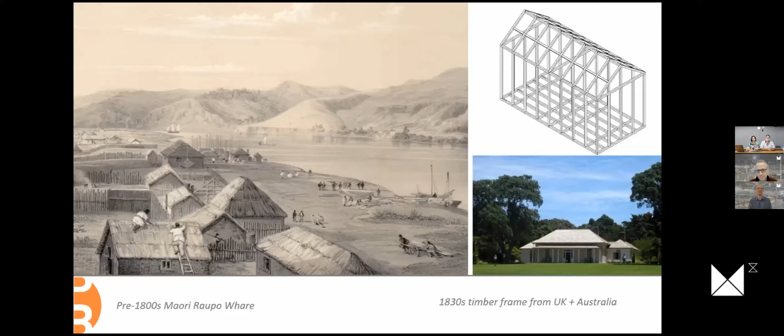Of course, when the white folks arrived, they brought with them kit-set housing. The image on the top right is the Manning Portable Cottage from the UK, and on the bottom right you've got a kit-set timber frame building that came from Australia to New Zealand, known as our Treaty House, a document signed between the Indigenous and colonial people in the 1830s.

In the 1970s, at the height of modernism in architecture and design, there was an influence from a group called Industrialized Building Systems. It was a panelized volumetric method with a very low roof, which was not very easy for regular customers to get accustomed to, because of course the vernacular is to have a higher pitch roof. There were big plans to have factories across New Zealand and Australia, and the government was even backing this.

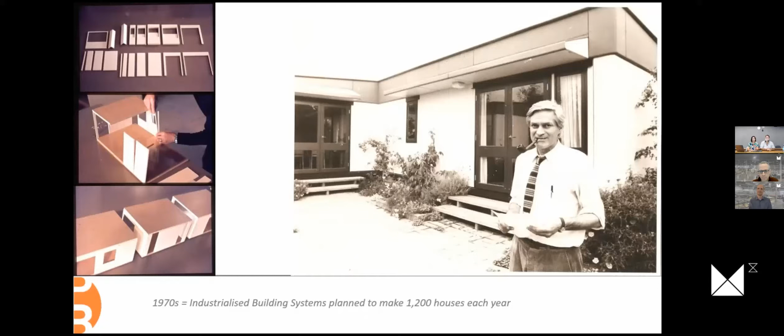But the understanding is, from speaking to a number of these gentlemen before they passed away, that the unions and the builders and carpenters in particular got that stopped. There was risk that they'd lose jobs.

So what has endured in New Zealand is a timber-based traditional building system, and Guy will talk more about that in a minute.

Another import from the Netherlands is this interlocking timber system, which goes under a number of brand names, including Lockwood. Today it's got insulation inside it, and there's an architecture design series to help promote that system of building. And then on the right, you can see the classic pre-nailed frame and pre-nailed roof truss factory. This is literally how 95% of our housing is built today.

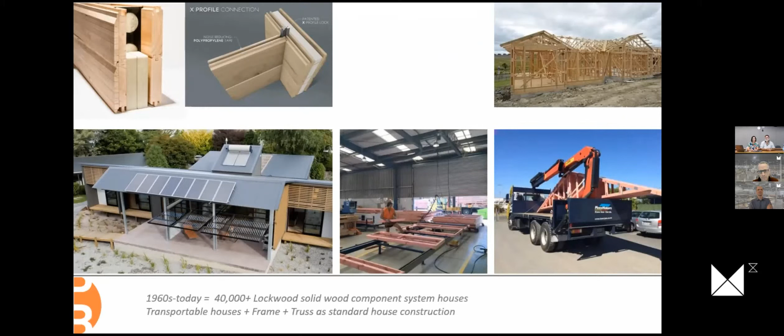Some of our houses get moved in one piece, and because New Zealand has got such a lovely long coastline with a lot of remote sites, we've had a lot of buildings on the back of trucks since about the 1960s, from memory. So where are things at today?

Today, this picture comes from Pam's work at PrefabNZ. So this is the way that we look at prefab in New Zealand. Things are either components that come to site, like we saw in the last picture, or fully built up...

...panels, or volumes, also known as pods, and then hybrid projects, which are a mixture of pods and panels, and then sometimes complete buildings that come to site. So a whole range of mixtures.

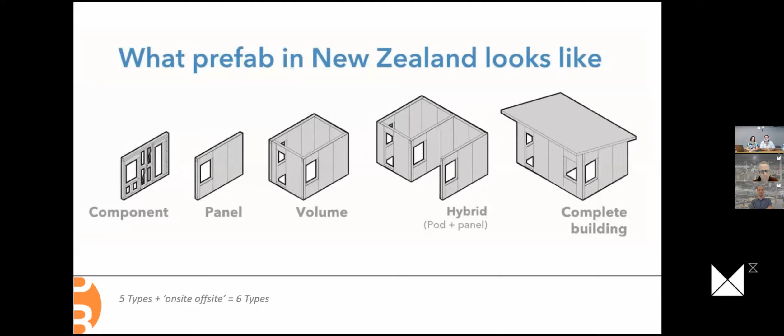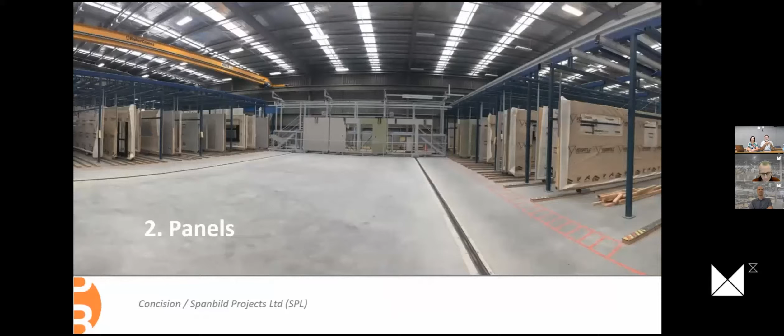The second thing we're looking at is panels. This is one of our new factories that can do this — we've only got a few of these factories. This is the big company down in the South Island, and they're looking particularly at wall panels and floor panels that come to site.

Then we've got volumetric, and this is a really interesting one. This was done maybe about 10 years ago now. You can just see in the middle of the picture a volume being lifted up. This was a student housing project.

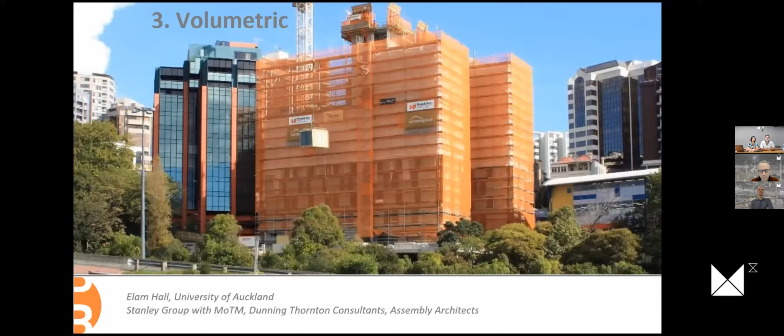The volumes were made about 100 kilometers away, shipped up here, and lifted into the building as they were building it. Every 3 floors they had a floor of concrete, and these completely timber pods were lifted into place, already pre-finished with a carpet down and a bed in place.

This is an example very dear to my heart. This is sort of a hybrid project, which we'll talk about more later — a project we did at Victoria University for the Solar Decathlon, which many of you will be aware of. This one won 3rd prize in the Solar Decathlon, so we're pretty happy about that. It went as a series of 5 completely built pod series of panels that were shipped in a container.

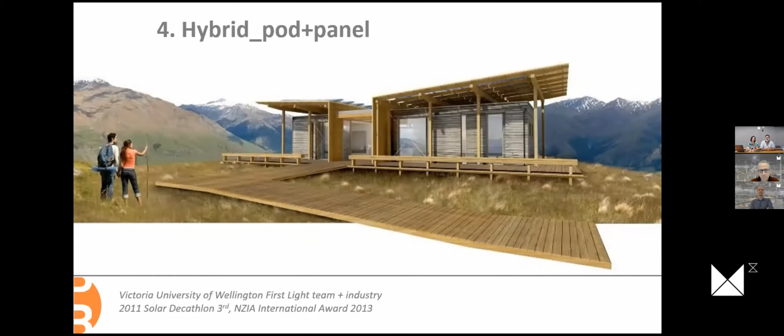Cool. So that's where we're at today.

What's really helped with awareness in the last decade has been the formation of an industry association, PrefabNZ. You can find prefabnz.com, and a whole raft of information is there, very much along the lines of what Ryan and Ivan talked about in the spirit of collaboration and sharing. The membership of PrefabNZ is a mixture of consultants, architects, engineers, builders and manufacturers, and anyone else who touches the design and construction journey and who's interested in prefabrication.

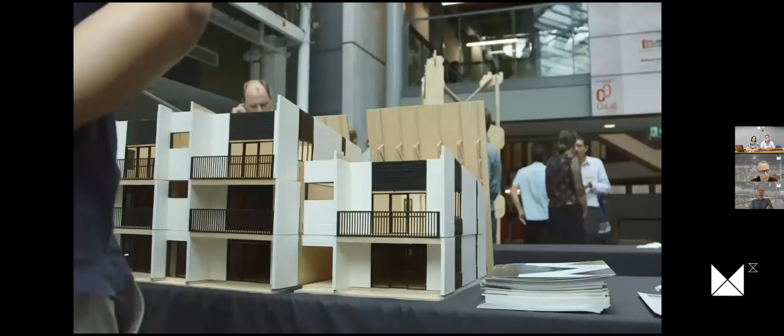Prefabrication and modular construction help with the capacity constraints that our construction sector is facing. We're talking about lots of automation, artificial intelligence, edge devices, cloud computing, thinking about how we can transform how we build in New Zealand. We are able to deliver buildings faster, safer, at high quality, and friendlier to the environment. 3D printing, we want to get little plastic objects into real buildings, and that's probably going to happen. If you want to be part of this, work with us. We're losing more people every year through retirement than we are gaining through new entrants coming into our industry. We said, let's just talk about digital fabrication, because some of this is real and we can exploit it today. Yeah, if you don't prefab, you're a moron.

And I think, again, for the work that you do in your industry, in your firms, in your workplaces, work that PrefabNZ does on this incredibly important task. Thank you.

So that was a good little snapshot of what happens at our events, a bit of wine drinking, lots of talking, a bit of agitation. That's a good example also of the proximity we are in New Zealand to our ministers. We had 2 ministers at that event, which was really useful, and also marked a point where prefabrication became part of the ministerial lexicon, and we'll talk a little bit more about that in a minute.

Look, this is just a snapshot of what you can do with an industry association in 10 years. For us, it was a journey of putting out provocative ideas, plans, value cases, identifying issues, I'm sure you're familiar with, mainly around permitting, or what we call consenting in New Zealand, access to finance, and unlocking some of the misperceptions around the use of words around prefabrication, modular, offsite, etc.

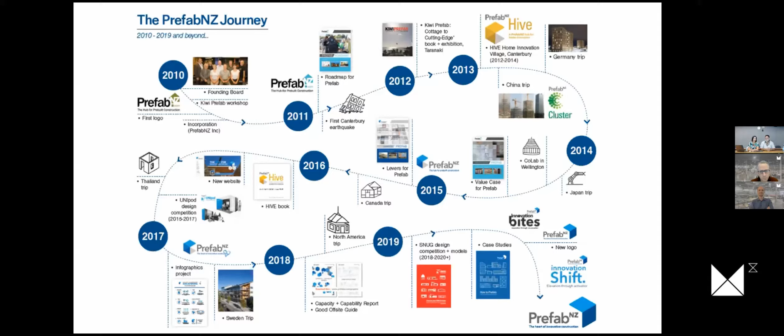We also experienced an earthquake during the time PrefabNZ was established, and responded by setting up a show home village. We later wrote a book about that, and we did a number of design competitions that we'll touch on as well. And when the government looked really closely at importing prefabricated homes from offshore, we set out and did a capacity and capability report that showed just how much the local industry could develop.

So, Guy, over to you.

Okay, so just a few words about the market forces in New Zealand. I guess the way that we have always traditionally built in New Zealand is this, and possibly you're aware of this as well, but this is what we really like to do in New Zealand: we're one man, one view, and that equals one house. That's pretty much how everything has been built up to now. Pam and I are really keen to change that because we think it's rather inefficient.

But we've had a number of events, and Pam mentioned there was an earthquake. There's actually been, I think, like 6,000 earthquakes since that big earthquake. It caused a huge amount of damage, killed 185 people. Over 10,000 buildings were demolished, and another 100,000 buildings were severely damaged. The ground basically liquefied. Everything that was brick fell down, and everything that was stone fell down, and everything that was timber more or less stayed together. You can see in that bottom picture, that building, lovely old building, but the roof, which is timber, is still hanging together, even though the floors below have completely collapsed away. All the brick is gone.

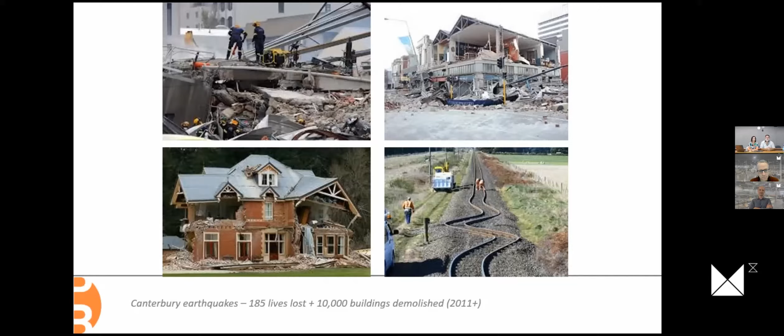We like to think that we're up there with the wealthiest countries, but in reality we're not. We've had a massive increase in both population and property prices as a result. Air New Zealand, our airline, is grounded internationally, flying only nationally around the country. But we've had a lot of people returning home, caught up in COVID overseas, coming back to New Zealand, which is great. So we're running out of houses because we don't have enough room for everybody.

We should say we're not actually socially distanced, because we're not under an alert level that requires that, so no masks. Many of you may know that we're not so much containing but eliminating that risk. So it's a little bit life as usual here compared to the rest of the world. Life as usual, but no holidays overseas.

One of the big issues we had was what's called the leaky building crisis. I believe in Canada there was a leaky condo crisis in the 90s, and New Zealand's been copying everything from overseas, so we even copied your crisis. We made all the same mistakes you guys had made, which is really disappointing. It's a culmination of all these events happening at once.

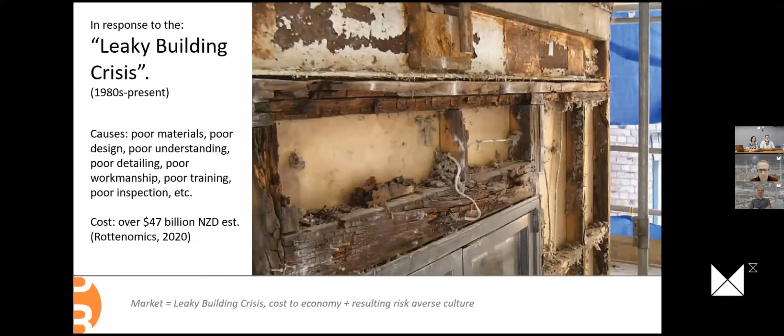So it's been a really complex market overview, if you like.

Another thing is we are in a growing, exponentially busy part of our industry. It's what's called a wall of work, and the shape of those permits or consents is changing. The yellow part of this graph shows the apartments, townhouses, multi-houses - what you'd call in North America multi-family. We call it medium density housing, or MDH. This is a part of the market that is growing.

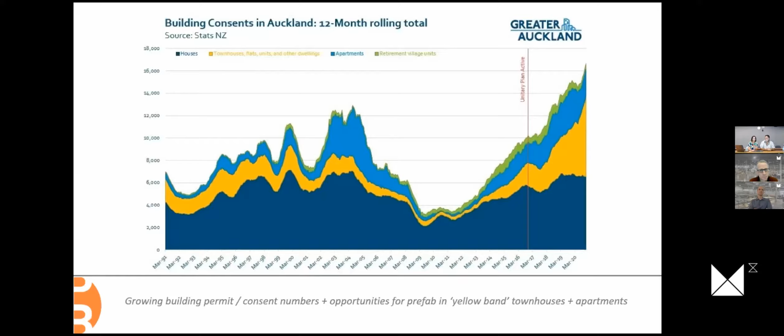It's very confrontational for our culture, because people prefer to live in a single family dwelling on what's typically coined a quarter-acre section. But by now you know that's completely unaffordable and not obtainable anymore. So the dialogue around housing is now much more about townhouses and medium density, which lends itself really well to prefabrication. So the question you might have is, what's with all the timber?

We had this as the question. The thing about New Zealand is that it's a long, skinny country with a wide and varied geography, but it's been heavily forested. It's only relatively recently discovered - about 1,000 years ago when the Maori discovered it, and another 200 years ago when the white people got here. So there's a lot of trees, and a lot of really beautiful trees.

So there's this huge amount of shaking that goes on. We had a batch of earthquakes last week. I think we've had about 50 earthquakes since last Friday, which sort of keeps us awake at times.

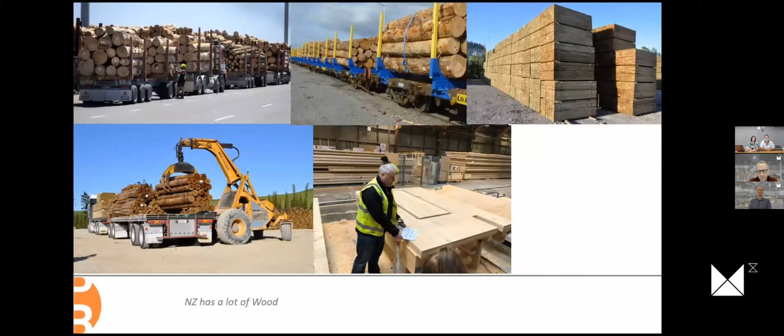Here is a lot of logging trucks taking these logs to port and just exporting. Most of our logs just go straight out as logs. What we're really keen on is to produce these logs into buildable products and then either use them ourselves or export them once they've been made into something more useful. So that's what we're really pushing here.

But we've already chopped down most of the native forests, so we're not allowed to chop native forests anymore, which is really good. It's where all the native birds live. But our forested areas now are about 95% radiata pine.

And in New Zealand, for some reason, it grows very straight and very fast. You can see there those skinny trees really powering up. So we've got very, very good skinny logs that we use.

We're also going to be planting twice as many as we are at the moment. Part of that is to offset our carbon balance, because we've also got a lot of cows and sheep that burp and fart quite a lot, and that emit lots of CO2. So part of our strategy for absorbing that CO2 is to have lots of forests in other parts of the country. So all of our farmers that have just been sheep farming or beef farming so far, they're probably also going to be tree farming as well.

Because we're always building our buildings out of timber, as you can see here, they're pretty lightweight. We showed that earlier picture of it being transported, but they can even pick them up and move them around. And we're really used to being able to alter our buildings in New Zealand, very much a DIY culture of do-it-yourself and pick up the hammer and build things, which is both great and also leads to a lot of problems, to be honest.

So we're really keen that in the future, a lot more buildings will be prefabricated so we can get the higher quality level.

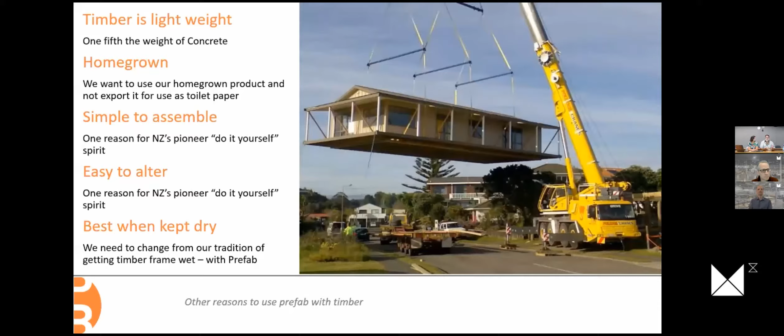So one of the areas of challenge and opportunity is government's role in this process or journey around prefabrication. And I just wanted to point out this great quote that came from the Farsight for Construction report that the CSIRO, which is a research body in Australia, put out along with Construction Skills in Queensland.

They point out that any kind of major change requires a really significant external force, that you need to have a number of enablers, such as the early adopters, the investment in innovation. You need to have the safe spaces for R&D, and of course you need the appropriate levels of regulatory oversight.

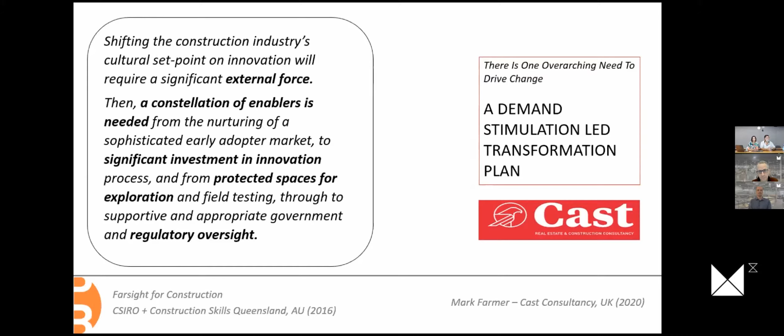So the really strong external force, I think, is what Mark Farmer from Cast Consultancy in the UK—you might have spotted him in that collab video—talks about: the overarching need for a demand-led stimulus from government, which is essentially government as client.

So in New Zealand, we have had an example of government as client, and that scheme was called KiwiBuild. It was put in a couple of years ago, and the goal was to deliver 100,000 houses over 10 years. Of course, we're aware of the great success Sweden's had with 1 million homes over 10 years in the mid-60s to mid-70s.

We weren't able to replicate that, due to a number of reasons, including the fact that the government's KiwiBuild scheme didn't get the buy-in from the public, they didn't get the buy-in from the media, and as a consequence, they didn't get the buy-in from the construction industry. They also weren't able to place large enough capacity and capability orders that would enable manufacturers to invest in upskilling, invest in manufacture, and invest in their pipeline of production.

So the KiwiBuild scheme has become a much smaller, resized scheme, I think is the appropriate word. And so that is now existing inside our social housing agency, Kāinga Ora Homes and Communities. Now, Kāinga Ora, which used to be called Housing NZ, has been doing really interesting projects. It seems that if you ring-fence something off in a corner when you're government, it's much easier to get something new happening.

So that's what they've been doing, piloting projects and then taking those lessons learned, and now they're doing the planning around putting it into business as usual.

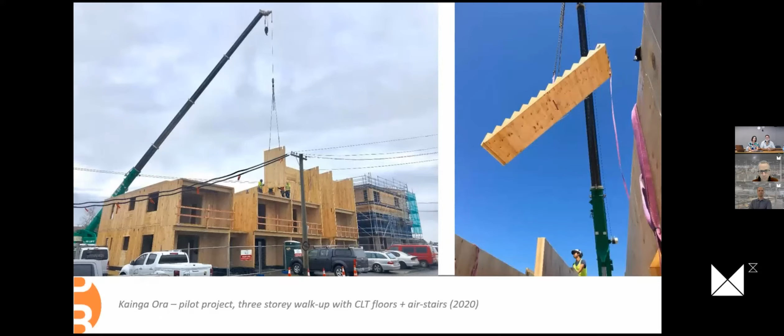So they've done a 3-story apartment walk-up with cross-laminated stairs, floors and walls, as you can see from these images. I've been doing some work with Kāinga Ora on this building momentum strategy, which is about building better, because the social housing agency is now being tasked with almost double the amount of houses it has to produce every year. So you'll remember that social housing need graph - we're having to deliver more and more every year.

So of course they're looking for better ways to do that. It's around better partnering, better innovation, quality design, better delivery, and better sustainability. So if you can remember the axiom of more for more people for less money - yes, it's trying to do that.

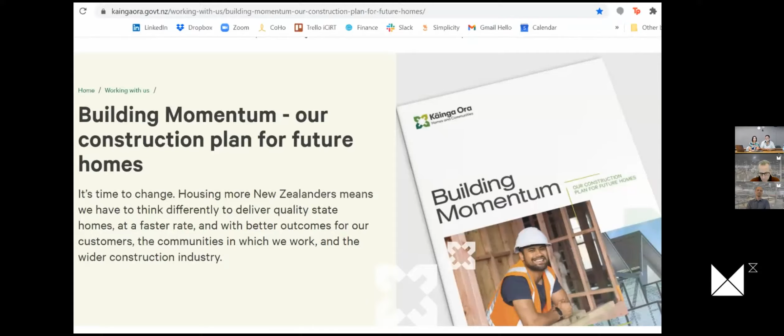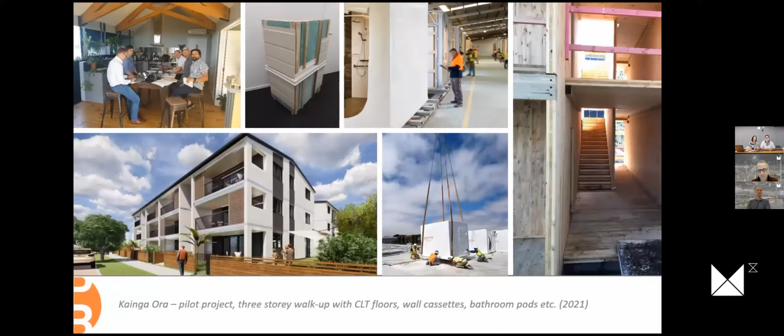So one of the really interesting pilots they are pushing ahead with now, right on the edge, is cross-laminated floors and internal walls, an exterior composite or cassette cladding wall panel system, and infill pod bathrooms. So to me, that's the ultimate hybrid. Really watching that space with interest.

So recently the government has been looking at updating the legislation we have, because our legislation is probably a little bit out of date for this. There's a new bill going through government at the moment. It's got a really snappy title, the Building (Building Products and Methods, Modular Components and Other Matters) Amendment Bill. So you know, even the bill is going to be really overly complicated.

It's got interesting things where they're talking about legislating building products and building methods, which to my mind is a little bit simplistic, in that you could argue that a nail is a building product and a building method is to hit it with a hammer. How much legislation do you need on that?

Obviously they're looking at larger things than that, but they're getting quite involved in trying to attribute where responsibility lies, who's accountable for the building at what stage. And so part of this bill - I can't even say the name - is that they're looking to have a specialist framework for what they call MMC, Modern Methods of Construction. To do that, they're going to set up a system of modular component manufacturers, MCM. So you're going to have to certify that with the MCMC, and that will go through an MCMCB, a board looking at the MCMC.

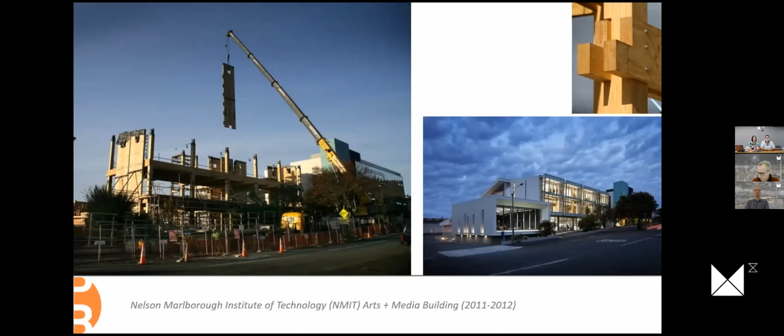So over 10 years ago this project came together, and it's got large plywood kind of rocking walls with pre-tensioned steel inside them. The idea here is to have a seismic resistant design, one where the building could be reused, because as we know from Christchurch, there was a huge amount of wastage in the demolishing of buildings and parts of buildings. So the idea now is to use timber with steel pre-tensioned to be able to have a reusable building after the fact.

This is another one of those types of buildings. There's post-stressed steel inside the columns and beams. And that system can be inside concrete or timber - yeah, Pres-Lam, that's what it's called, isn't it? Yeah, a couple of extra. Some really interesting ones. Thanks for the post.

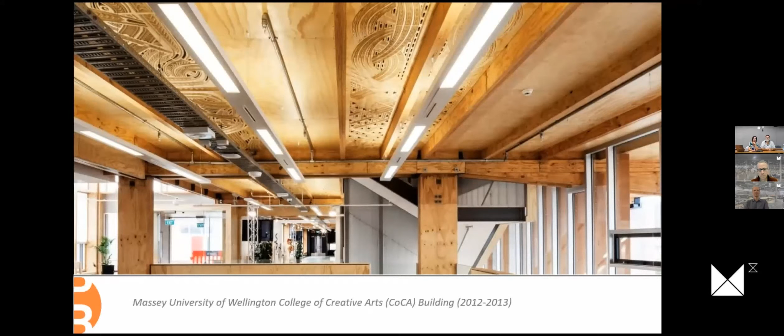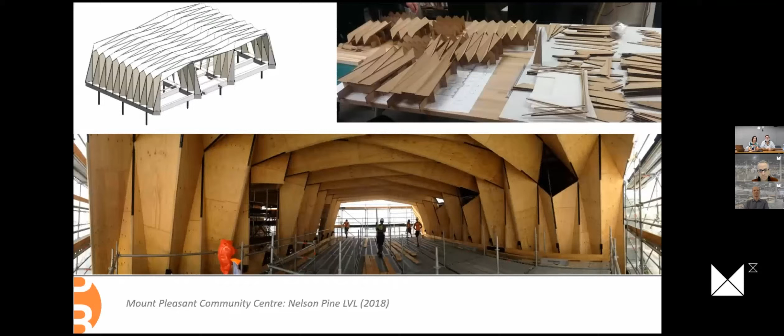This is a really neat building using laminated veneer lumber. It's the Mount Pleasant Community Centre, and this has won both national and international recognition for the engineering. And of course, this is that lovely idea of structure as interior surface, creating one job with one material.

New Zealand was the first country in the Southern Hemisphere to create a cross-laminated timber, which was bought and closed and moved to Australia, but that's a story for another day.

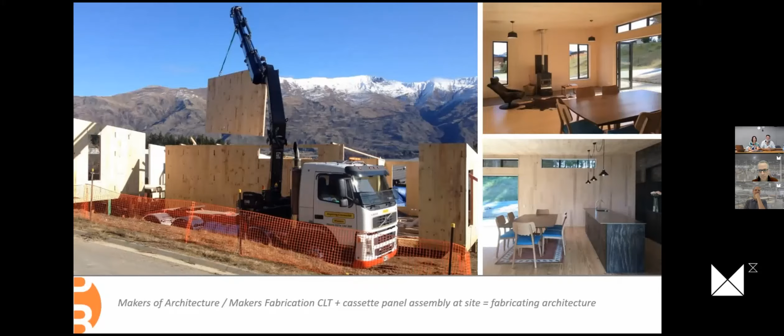This is a really interesting firm of young architects who have got a making aspect to their studio as well as a design aspect. They went and bought their own CNC machine.

So here's our last section. This comes out of work I've been doing with that company, we'll talk about them in a second. This is the project that really set it all off for us here at the school. You've probably all heard of the Solar Decathlon in the US. This was the first time a building from the Southern Hemisphere had got there, and so we took it very seriously.

We designed this building, all designed by the students, and I was just sort of overseeing things. The building then went off to the States on the back of a boat.

Ours was the most travelled house in the history of the world. It's been around the world - not many houses have been around the world, some have been halfway around, this one's been all the way around. When you see it here, this is the fourth time it's been erected, as it was made so that it could be erected and taken apart and put back together again. It's currently residing in Hawke's Bay, which is a lovely part of the world.

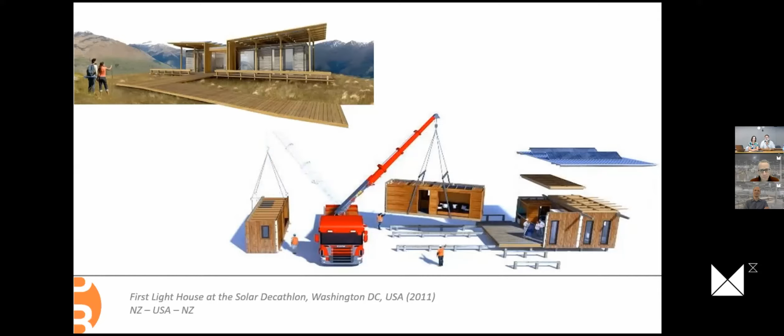This was a really interesting project which a lot of us got very interested in. Following that, we set up a company called First Light, after the house, and we also managed to win a PrefabNZ competition.

First Light won this competition for a UNIpod, which is a combined bathroom and kitchen pod, where all of the technological stuff is in the wall, and then your bathroom or your kitchen can get bigger as required. This has been really interesting, and we've got some industry partners looking very seriously at this, which is great.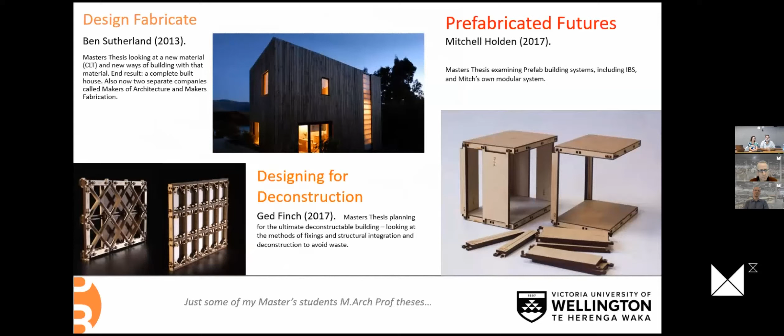And then the final one down the bottom, designing for deconstruction - Ged Finch did his master's with me looking at ways of avoiding waste, and he's since gone on to form his own company, X-Frame. X-Frame is the system he developed in his master's, which he's now been developing in his PhD. He's building a number of these houses, both in Australia and New Zealand, with a really huge amount of waste reduction.

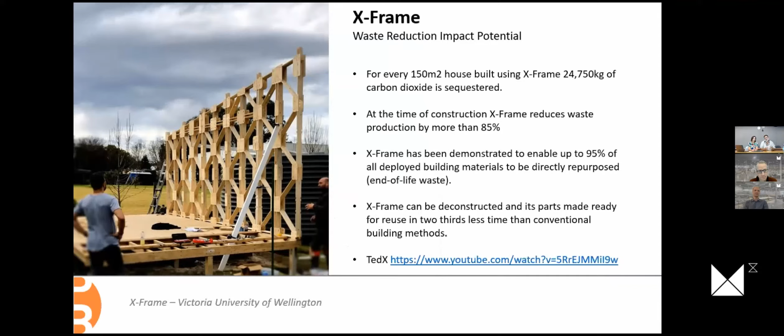And the reuse of the building - these buildings are put together with this system that we've tested. There's no screws, there's no nails, it's put together with a few bolts. But the whole building can be taken apart and reused, and it's quite strong.

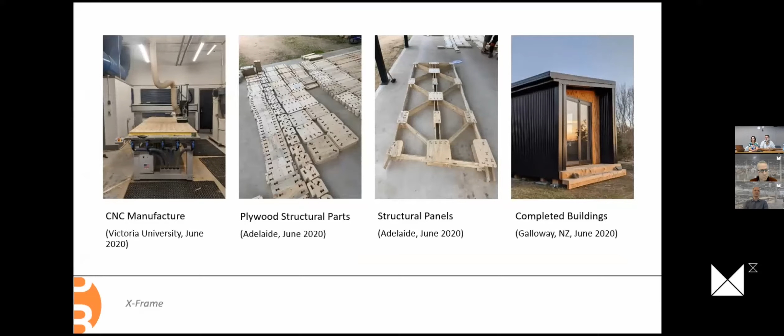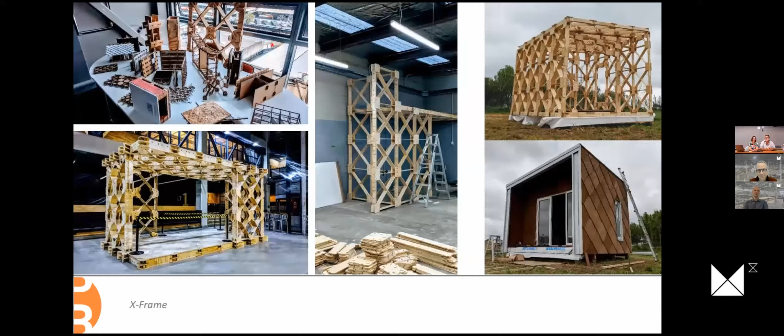Ged, everyone in this country is talking about a very clever young guy. A lot of pressure on his shoulders, but he's doing well. He's got a really cool TEDx talk if you want to Google that. We'll make sure those links are in the show notes along with any videos.

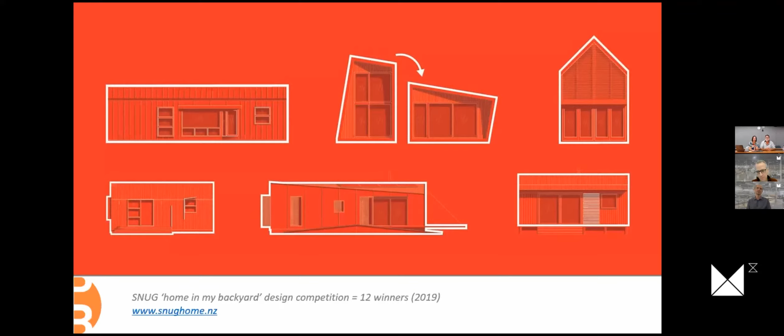The idea was that a pattern book was created, so we weren't putting forward one idea, but many different ideas for people to reconsider how to repurpose their own backyards. That lovely wee one up in the middle on the top was the cute one that won the People's Choice Award.

We did an old-fashioned street poster competition with a digital survey, and these folks won the People's Choice. It was based, again, on those good people from First Light Studio who keep popping up, based off the New Zealand jandal or flip-flop, which is our preferred footwear when we go to the beach.

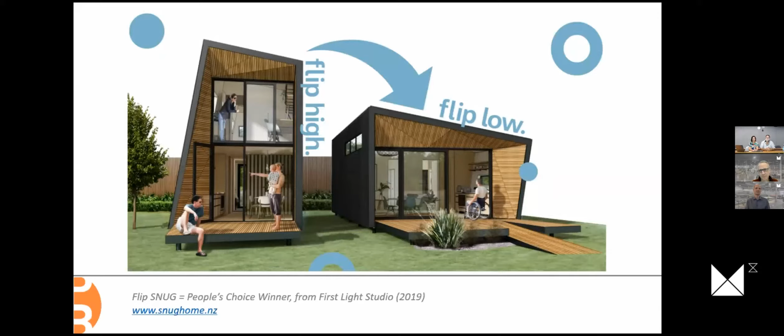We brought all 12 winners to life through scale models with the help of Victoria University of Wellington students over a summer project, and had them on display at a number of conferences, including PrefabNZ's own conference, the CoLab, a couple of years ago.

And it has turned into a company. We're formally called Flip, which is starting to roll these out around the country, which is really satisfying.

But we're running out of time, so we're going to wrap it up, I think. We are. And this is the way we wrap up.